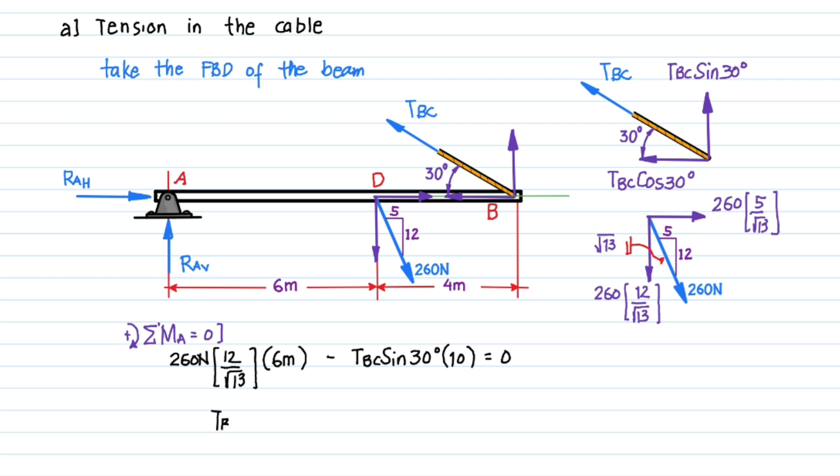And the value of TBC is equal to 288 Newton. Tension. This is our answer to question letter A. Ang value ng TBC ay 288 Newton.

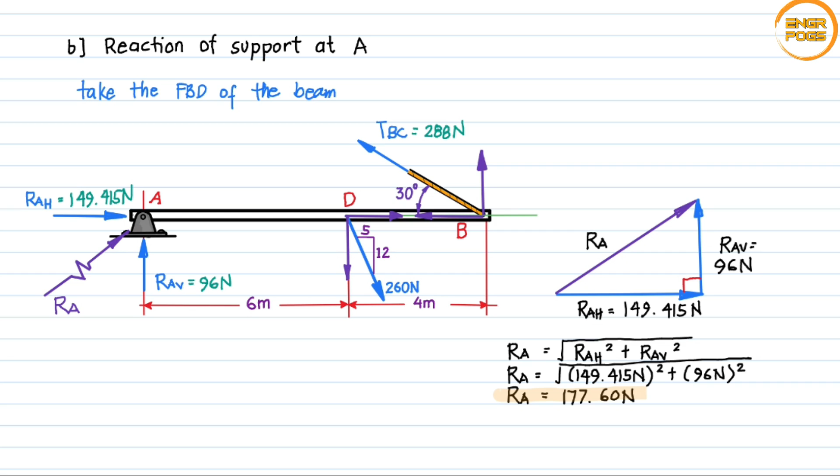For question letter C, determine the angle that the reaction at A make with the horizontal. Ito yung angle na hinahanap natin, yung angle ng RA from the horizontal, which is the angle between RAH and RA. So, eto din yun. I-denote natin to na theta. Using trigonometric function,

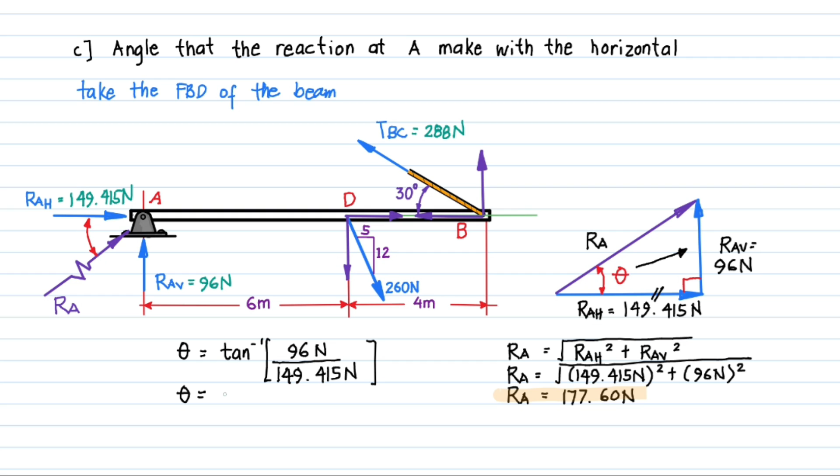tangent theta is equal to the side of triangle opposite to angle theta, which is RAV, 96 Newton, over yung side ng triangle adjacent to angle theta. Ito yun, RAH, 149.415 Newton. Theta is equal to arctangent ng 96 over 149.415. And the value of theta is equal to 32.72 degrees.